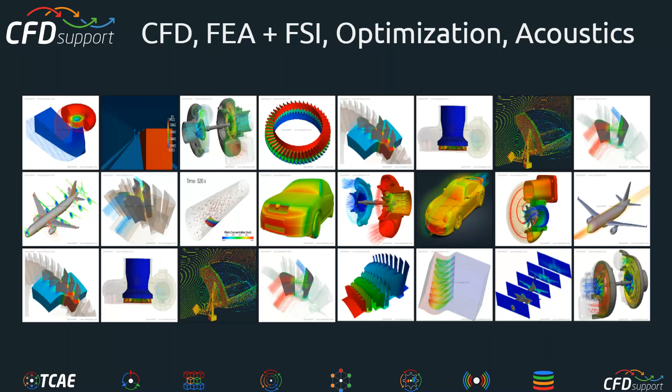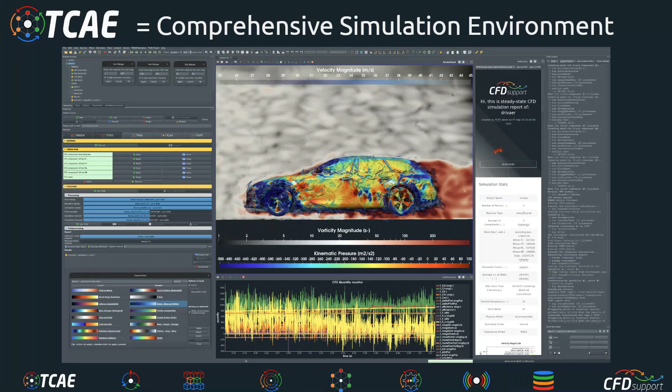But of course, the main product of us is simulation software, which is called TCAE. TCAE is a comprehensive simulation environment where the users can simulate fluid dynamics and related tasks. So that's TCAE, and we will introduce you the new version today.

But let me first note a couple of important notes about TCAE. It consists of software modules. Not everyone needs everything, but all of them can be used, or just one of them can be used. So TCAE is a set of software modules, and every engineer, every user can pick or choose the relevant software modules that work for him or her. So that's important, there are software modules.

There is a module for meshing, for example. There is a module for fluid dynamics, for finite elements. There is a module for acoustics. There is a module for optimization, and some other modules are already in progress. So it's always up to the user what module is used.

That's important. And there are a couple of principles we follow with the software. It's our philosophy, and we follow these principles. So I will now speak about those principles.

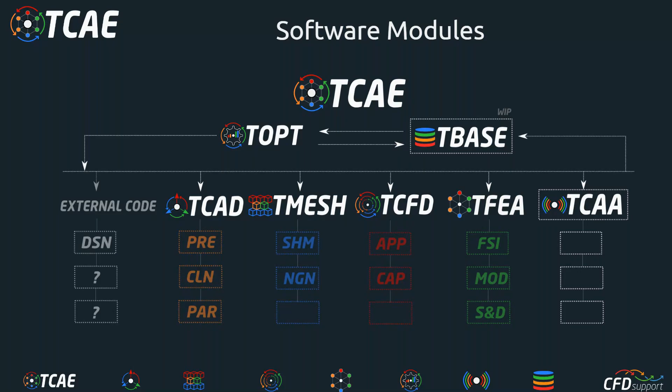TCAE is flexible. Flexibility is extremely important for us. We believe that every engineering department is specific. There are specific habits, specific experience, specific tools, historical development, and everything. So we are extremely flexible.

TCAE is flexible, and it's possible to be used in different ways. It can be used by a single user, it can be used by multiple users. It can be run inside another software, or it can run another software. It's ready for modern workflows, and it's extremely flexible.

It works with other open source pieces. It works together with in-house codes. It works perfectly with commercial codes. It's really ready to help and to be used in a way that is necessary and appropriate to users' skills, users' resources, users' ways of work. So it's flexible, it's unlimited.

It means that yes, we license it because we have to make a living from something. So there are licenses, but the license is provided to a single organization, and there are no limitations on number of its users, jobs, cores, sessions, hardware installations, anything. So basically, the client can use their resources to the fullest. It can be run on multiple software or anything. So for this, it's really unique.

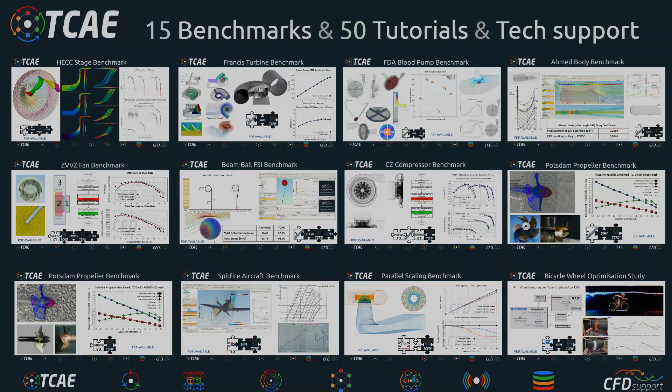TCAE is based on open source. It means it's built on open source pieces, because here at CFD Support we have mastered the process to learn open source, integrate it into TCAE, and provide professional tools based on open source that can be used for real industrial projects. That's very important. There are more than 60 open source projects, and we maintain and update them all regularly. So you can imagine how much effort it takes to put it into one comprehensive package which works.

On top of these open source pieces, we have invested and spent more than 50 man-years of development here, in a group of a couple of PhDs who consistently develop these open sources to deliver TCAE as it is. So that means we have spent enormous time and effort to make out of open source something which is usable in real industrial practice, and that's really the core of all of it, basically.

Okay, so today we are coming with the new release. It's 25.10.

It's so much better than anything we released before, because we have removed more than maybe about 100 bugs that are everywhere, because creating software is in fact really difficult. You have to be prepared for endless variants of options from various users in various conditions for various projects. So it really is difficult to create it, maintain it, and support it. Believe me, we have spent a lot of effort. We have fixed more than 100 bugs, and on top of that, we have created quite some appealing new features.

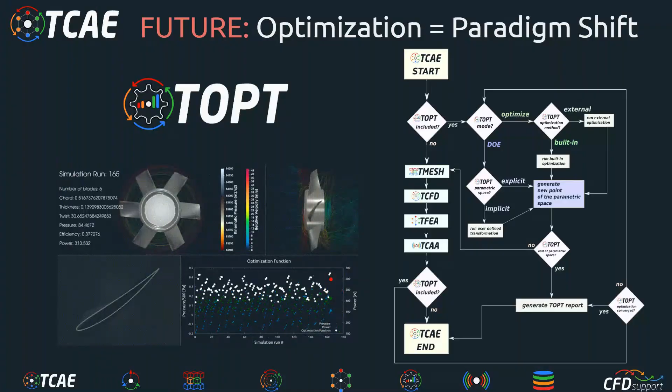We definitely will dedicate a lot of our best research time to acoustics, because acoustics is something really advanced, and not everyone can do that. So we will keep our eye and keep focusing on acoustic simulations for the future. So these two are really important.

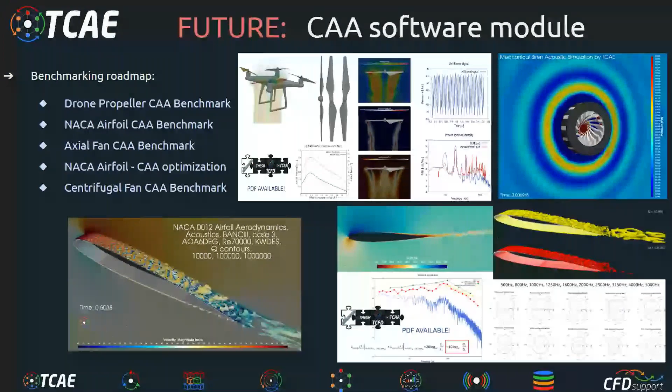We also have a passion for biological flows, especially blood flows. These will be quite researched in our company too. We are going to deal even more with hemolysis and rheological models like shear thinning properties of blood, also the viscoelasticity and a little bit of chemistry, and based on these specifics of blood, we will be optimizing blood pumps. So definitely biological flows are something we are going to keep working on.

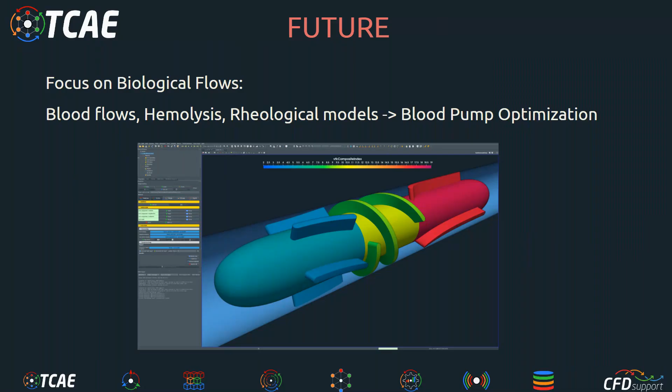Then we are working on a new software module, which is called T-Base. It will allow every user to store results in large databases, keep them for the future, and based on that data, it will be possible to run machine learning and AI, specifically to create surrogate models to give answers in seconds instead of hours or days.

So T-Base is very much advanced already, and the development is in the advanced phase. We are testing it currently, and we will very likely release it soon.

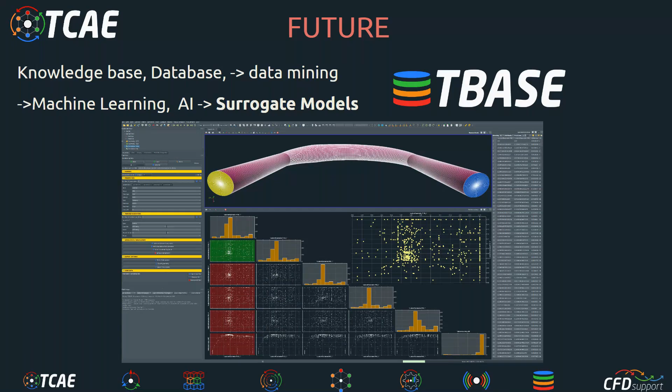Which brings me to what will be the next release. It's scheduled for spring 2026, and it will be huge, because there will be a new OpenFOAM update based on openfoam.org, plus the best things available across the OpenFOAM community, plus those many years spent on open source. So it's a really big update, because everything will be updated to the latest version, and it's quite a big deal. There will also be T-Base, so the first T-Base version will be released next year.

It will be the kickoff year of practically new software, which will be revolutionary, because not only will we develop it, but we will give it into the hands of our users. That's important, it's not being hidden anywhere. It's the real democratization of software, because every user will be able to save their results and use them with AI and everything. So that's what we are going to do, and it's coming. There will of course be version updates next year, and many more.

Okay, Achtung. It seems that there's an expert waiting on the air. So let's take a look.

So, knock, Radek again, are you following? Yeah. Are you going for it? Yes, I was following, so perfectly said, the first part of the webinar. That's great, and I will just continue with a more detailed description of the new features, utilities, etc. So yes, that's really great.

So if I ever will find how to switch the presentation over to you... there's new graphical interface in this, and well, this is me, and well.

Okay, it's a little bit embarrassing, I don't know what to... Oh okay, I see Radek is here. Make a presenter. Okay, GIF, no, you make a presenter. Okay, so I got it, I have it. Sorry for this, I promise I will learn it for the next webinar.

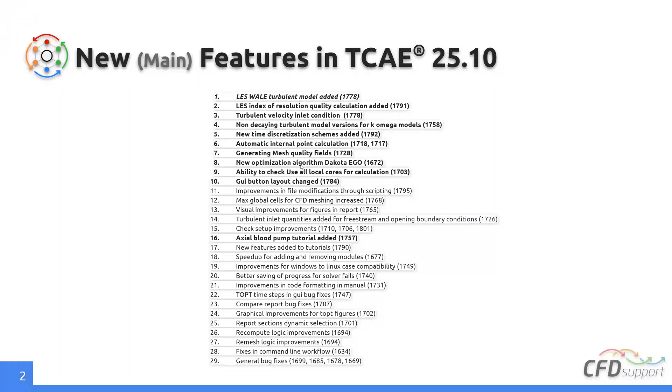Okay, thank you, Luboš. Welcome again, and I will directly dive into the particular features we have implemented. Besides these features which are visible to the user, we made dozens, up to hundreds, of small code fixes, functionality fixes, and other stuff which helps the project be more robust, more stable, more user friendly. This is the list I got from my colleague Prokop, who picked the main merges in our code repository, and I picked the most visible ones and created a short presentation to present these several features which we bring into the new version of TCAE.

So this is the short list. There are just a few small cosmetic changes in the layout. There are new functionalities for the T-Mesh. The main functionality is that the internal point can now be automatically set, so there's no boring stuff like looking for the point which lies inside the domain or inside a component you want to mesh. This is really a nice feature.

Mesh quality fields can also be computed and visualized. Another one: if you don't need to worry about or look for how many cores your computer has, there's a new automated function which just reads the system information about the physical cores and automatically sets all the cores for the simulation if you want.

Then there are a bunch of new features connecting or touching turbulence modeling. One is the non-decaying version of k-omega turbulence models. Then we implicitly bring the LES modeling, so there's no need to enable it via scripting - now you can find the implicit LES model. We started with the wall-adaptive version of LES turbulence modeling.

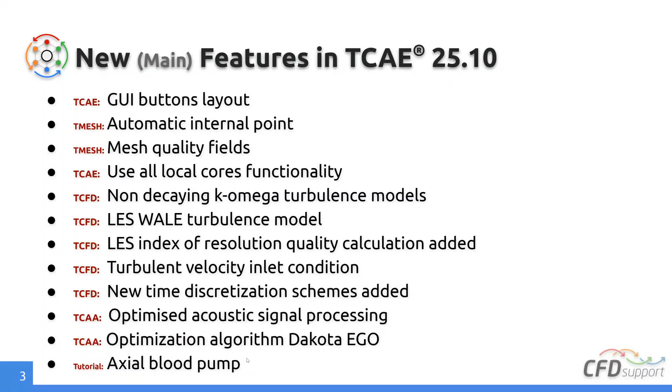Alright, so let's start with the cosmetic changes. You don't need to be scared if you see the GUI layout for the first time. We put some buttons out from the other options to be directly visible on the main panel, like these restore and purge buttons. Restore is just for restoring the case to the preset moment, ready to bring the project ready for simulation from the plain start. The purge button is for when, for example, you would like to share the project with someone for support, or to send to us, or just want to keep the setup and get rid of all non-necessary files like results, etc., for later usage and to save some storage on the disk. So these are just smaller, cosmetic changes in the layout.

But now let's go to the nice features which bring new options for the user. So the first one is the automatic internal point.

Now you don't need to care about the internal point. For those who are not familiar with creating the simulation domain and the meshing part, typically the mesh is created using the external geometry in STL format. If you are using internal flows, you build the geometry from components, parts which are connected next to each other, and each part is meshed separately.

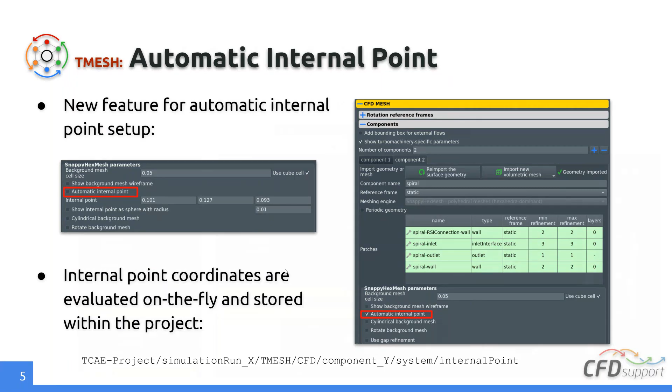Still in tmesh, there is now the option to evaluate mesh quality parameters as fields, which visualize particular parameters like non-orthogonality, skewness, cell ratios, and others. You can easily enable it by clicking in general, in the tmesh section, clicking on write mesh quality fields. Whenever any component is meshed successfully, you can visualize the mesh, and automatically within the mesh there are several fields which you can visualize.

Let me show an example. I loaded the simple pipe tutorial, and I'll show you this automatic internal point option. As you see, you just need to click here - I think now for the new case it's default. You can keep it this way, and you don't need to take care about placing the internal point inside your component. Let's go click on meshing.

Let's go to the manager. I will click mesh all, and now the meshing will start. But first, because I made some changes, I need to apply these changes, and now I can click mesh all. So now the meshing is being done.

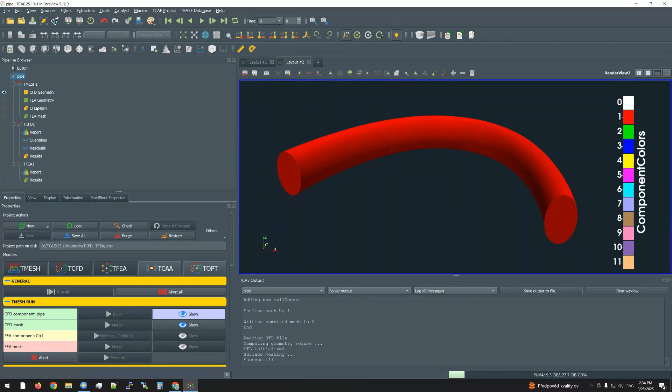When it's done, I can click here, show component. I'll get rid of it, so now in the pipeline browser I need to visualize it. This is the CFD mesh, I will get rid of CFD geometry, and as you can see now there are several fields to be visualized - these are the main quality parameters of the mesh.

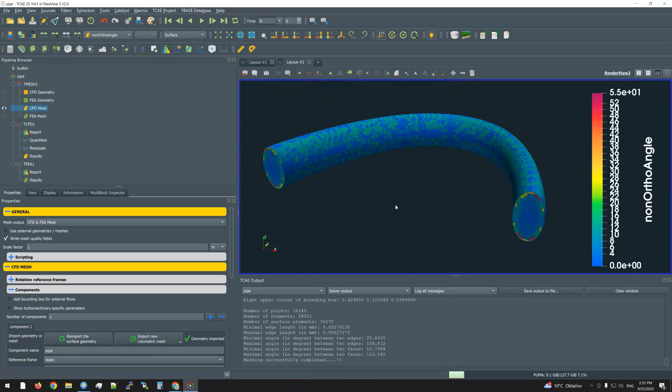Typically the non-ortho angle visualization - for bad meshes, you can nicely locate the bad non-orthogonality regions and try to, for example, remesh it. Maybe it's connected to the bad geometry quality or sharp edges, so then you can redesign the geometry and try to remesh the component and see if it helps, if you reach less non-orthogonality, etc. You can play with this visualization as you want.

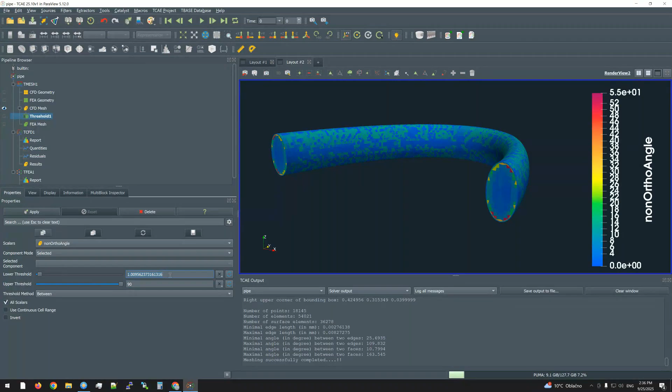For example, if you would like to see the given non-ortho cells, you can apply the threshold and choose the given parameter - for example, this non-ortho angle. Now I would like to see all the cells which have non-orthogonality higher than 40 degrees, and now you can see all the cells having non-orthogonality larger than your threshold. Here maximum is 55, which is a pretty nice mesh from the non-orthogonality point of view.

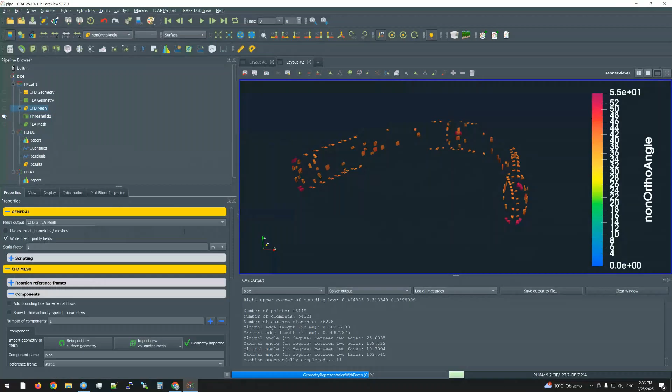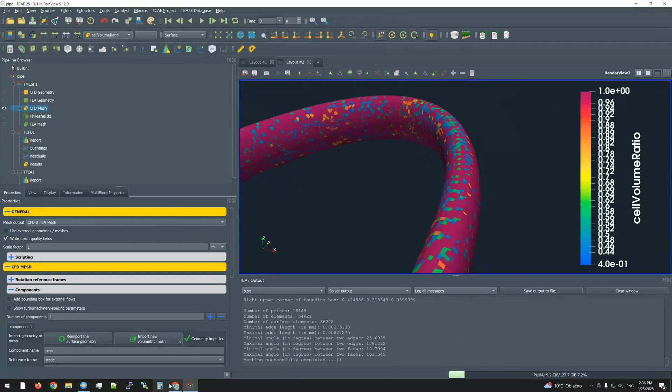In the same way, you can visualize the other ones: aspect ratio of the cells, cell volume ratio, or cell volume itself - the sizes of the cells. Cell volume ratio, for example, is the minimum ratio of the neighboring cells to the given cell, etc. If you would like to see the list of all of them or any other explanation, you can go to our web pages, to the documentation, open the manual - for example, I'm not sure what cell volume ratio is, so I will type cell volume ratio.

Okay, if I type it correctly, it should be found. Yes, so the cell volume ratio is the minimum ratio of a cell's volume to that of its neighboring cells.

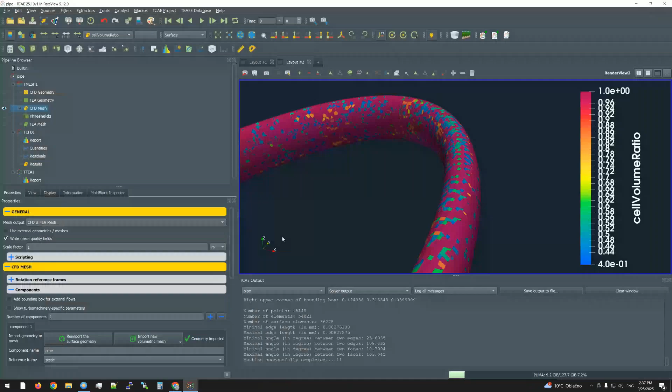Here are the explanations of all these parameters. I think this is a very nice feature, mainly for tuning the mesh to the best possible quality. In this way, you can really nicely play and visualize what you need.

So this was the mesh quality fields. All you need to do is check these mesh quality fields, because it takes some time to evaluate them. If you go for optimization or some repetitive work, you are able to uncheck it just to speed up the whole process. So therefore, it's on demand and not automatically evaluated.

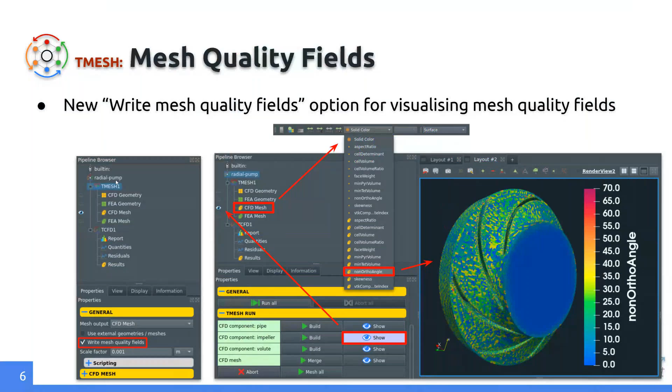Then there's a new feature, the use all local cores functionality, which is a small feature but pretty useful. By default, if you go to the tMesh or TCFD module where the number of processors is set, you can set the number of processors you would like to use if you don't want to use all physical cores, or if you set it to 0, it will automatically use all local cores. It will just check the system properties, find how many physical cores are available, and automatically set this number for the simulation.

It's connected to the local cores, not to the nodes or some clusters. So it's always connected to the node from which the TCAE was run. All right, so the use all local cores functionality is also pretty useful.

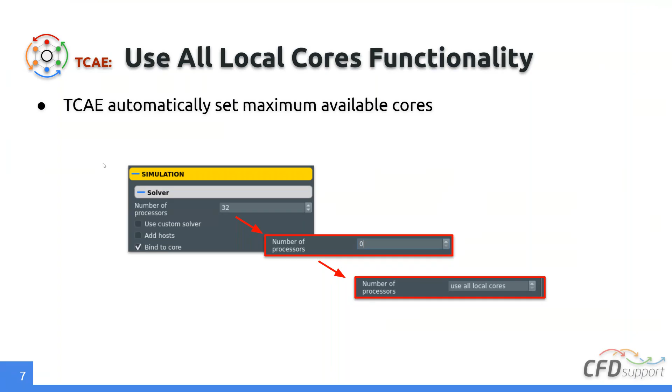Then we are coming to turbulence modeling. We have requests, and we see the importance of proper turbulence quantities modeling, typically for external flows. You can imagine if you do external flows like airfoils or any other, you make your domain big enough to get rid of the influence of boundary conditions and boundaries.

But if you make the domain pretty large and you keep the standard setup for k-omega quantities, there is huge dissipation because of the omega dissipation of kinetic energy. You typically know what are the proper values to be used for the simulation near your body, not far from your object. One option is to somehow apply some set fields and keep some values in half of the domain before your object at the chosen value, or we implemented a more clever option.

This is the non-decaying k-omega turbulence model, which basically keeps the minimum value at the inlet within the domain. Pretty simple to explain: the turbulence equations are equipped with a new decay control term, which eliminates the effect of the dissipation. It just keeps the values of k and omega at some infimum or minimum values, which is set in the given dictionary.

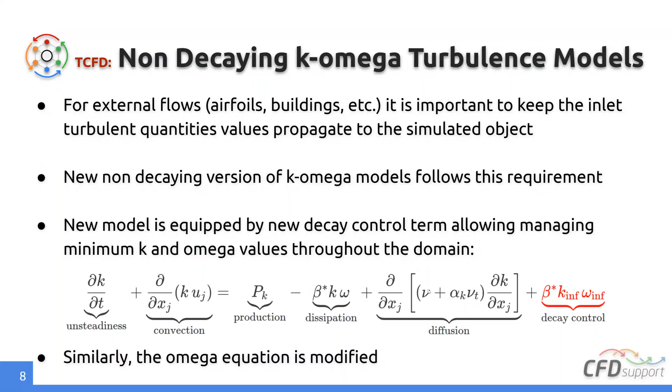What is the effect? For example, if you are simulating airfoil external aerodynamics, typically the standard way is to have the domain 100 times larger than the span of the airfoil or the chord. So the domain is pretty large, hundreds of meters if you have a 1 meter airfoil.

If you set a standard k-omega turbulence model and you set some value at the inlet for k, for example 0.5, and omega to 10, which is pretty low omega, you can still see decaying of these values, and basically just before your object there are totally different values than what you set for the simulation. Even if the omega is larger, which typically is the case, the turbulence intensity or kinetic energy is pretty low, and it doesn't follow, for example, the definition of the simulation or of the problem.

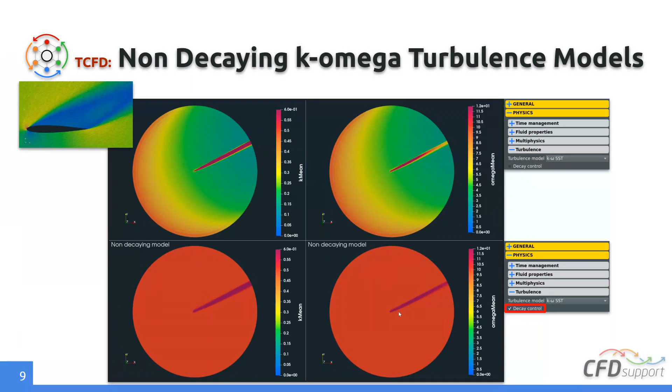So if you basically enable it, there is just one button, an option to enable or disable this decay control. If you enable the decay control, you will see that the inlet values are kept throughout the domain, and as an outcome, you really have the proper turbulence quantity values near your object. So you are simulating what you really wanted to simulate. This is the decay control.

Just to show you, it's pretty simple. You go to physics, to the turbulence modeling, and with just one button click, you have it enabled. This is the non-decaying k-omega turbulence modeling.

Then we implicitly offer the usage of the LES turbulence model. Particularly, we started with the wall adapting local eddy viscosity turbulence model.

To enable it, it's pretty simple. You just choose this model, for example if it's just for transient simulation, the LES. So if I go to the time management, I enable the transient simulation, and going back now, we have the option for which turbulence model to be used, with just two parameters: standard LES delta coefficients for the subgrid scale modeling, and turbulence Prandtl number for boundary conditions. Okay, going back, so this is it.

The importance of mesh refinement is pretty high. Of course, you can enable and run it even on a rough mesh, but the accuracy and the results will not correspond to the expected values. There are basically no limitations, the only limitation is that you need to really use a highly resolved mesh to get accurate results. But the setup is pretty straightforward.

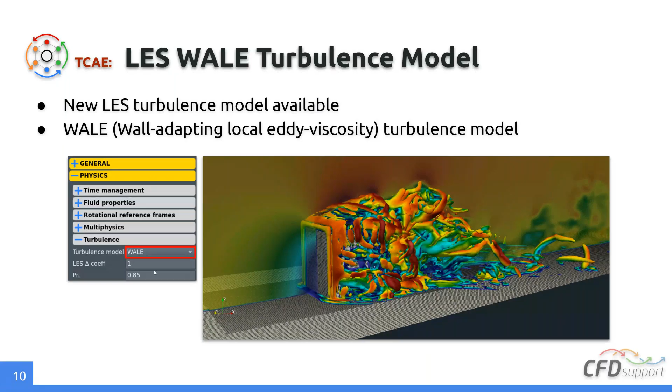Connected with the LES models, we implemented these LES IQ coefficients, which can show you if the resolution of the mesh in the volume is okay or not. This is a simple rule which compares the values of the resolved turbulent kinetic energy, resolved by the grid, and the kinetic energy which should be modeled by the subgrid model. This proportion should be close to 1, so if there is no modeling, the value should be 1. This is the first check if your mesh is resolved properly and your result has a chance to be accurate, and you are basically running the LES mode and not just some modeling. The appropriate values should be higher than 0.8, so at least 80% of the kinetic energy should be resolved, and typically you would like to see a value of 1 everywhere.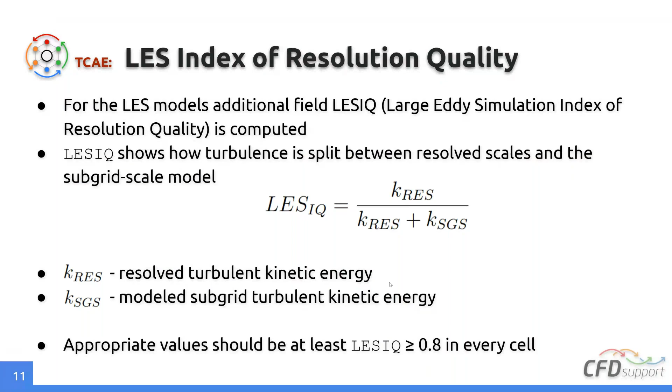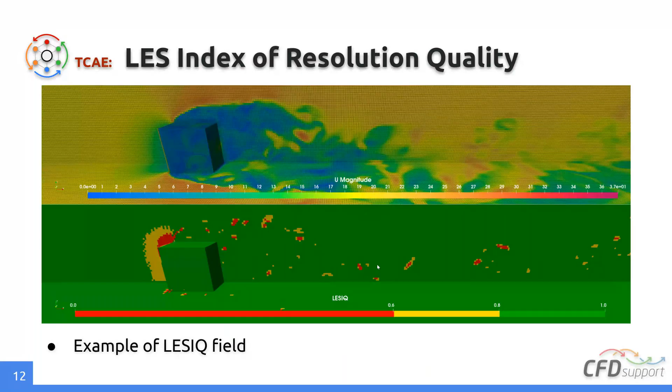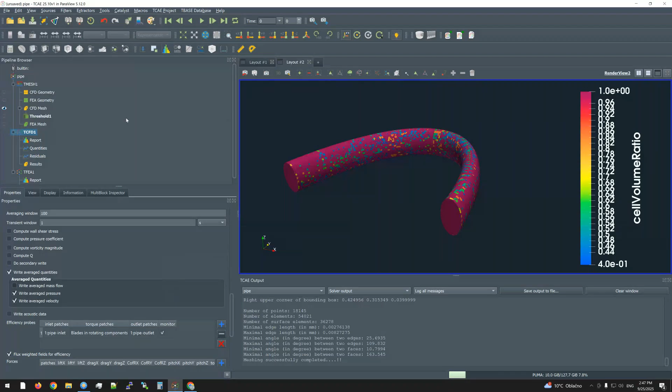And if you would like to compute it, it's pretty simple, it's done automatically. So what you need is to just check here in the runtime averaged quantities, to compute average quantities, to write average velocity, because it's just some fluctuation of the velocity to evaluate properly these indices. Then at the end you will see the field LESIQ, which can be visualized. I have no results here, but basically it's pretty straightforward, like you visualize velocity at the end of the simulation, in the same way you can visualize this coefficient. So this was the index of resolution.

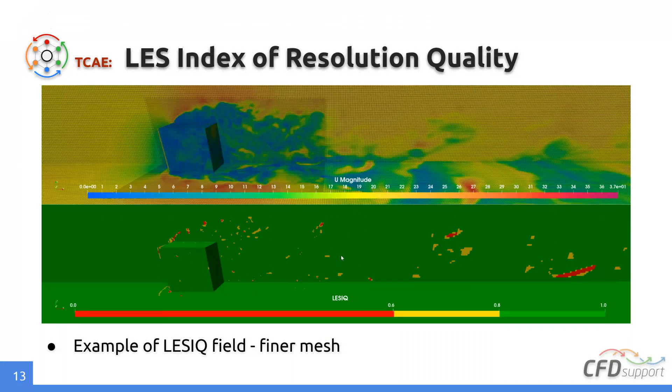And the last option is the turbulent velocity inlet condition. So when we are going into the LES field, we would like to also see the real fluctuation of the velocity, not just modeled by k-omega like for the RANS models, but here we would like to make some real oscillation in velocity. It uses a pretty simple boundary condition, called turbulent inlet velocity, which just adds a random component to the mean field. The parameters are basically the reference velocity, the velocity at the inlet, and the fluctuation scale in percentage. What you would like to add is just add the turbulence in the perpendicular component, towards the direction of the flow.

So the fluctuation scale is set in this case only in y and z direction. There will be a 10% root mean square value added to the reference field, so it doesn't change the flow rate, but it just adds the fluctuation. And alpha could be called some kind of relaxation, but it's not a relaxation, it's just the fraction of new random component added to the previous one. So you can basically model, or you can enhance how the frequency of the oscillation behaves.

Here's a simple example. This is a transient simulation, the LES, same as I showed you before, but without the turbulent inlet, so with a simple fixed inlet velocity. These vortices are visualized using the Q criterion. As you'll see in the next slide, I use two criteria: a higher one for showing vortices in this half of the domain, and a lower Q value to show the turbulent vortices for the inlet velocity.

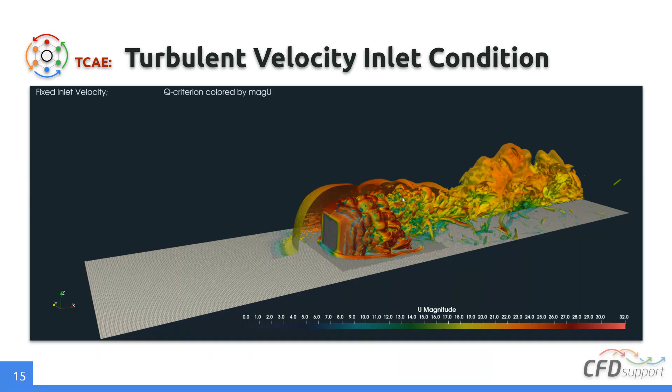So this is without it, and this is how it looks with the turbulent inlet velocity at 10%, as shown in the previous slide where the turbulent velocity inlet was presented. You can see turbulence everywhere now. This is basically how the turbulent velocity inlet works, so for a basic simulation with real turbulence velocity inlet, I think it's pretty nice.

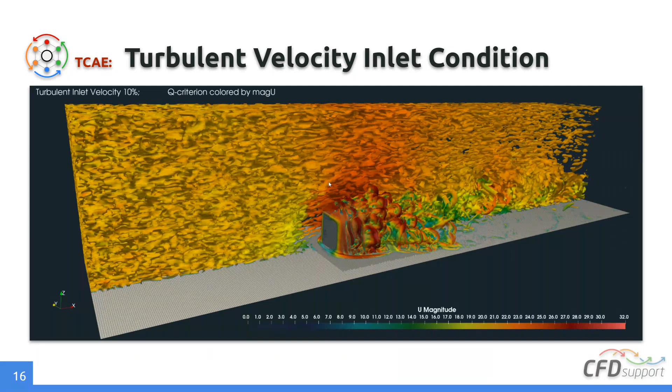Now the user has this option of how to generate the turbulence from the inlet for the LES-like or DES-like models.

For LES modeling, we also need better discretization schemes, both for spatial and temporal discretization. In previous versions, we needed scripting to enable these discretizations, so now we added it to the standard options. In the solver setup you now have special spatial and temporal discretization options, with a list including Euler, the first order implicit scheme that was default in previous versions. Now you can also choose backward, which is a full second order scheme but potentially unbounded, so everything needs to be smooth enough to enable it.

Or you can go for the Crank-Nicolson scheme, which is second order implicit but blends between Euler and Crank-Nicolson. Based on your geometry and physics you should choose the proper value; 0.7 up to 0.9 is okay for standard industry applications. So now you have these options.

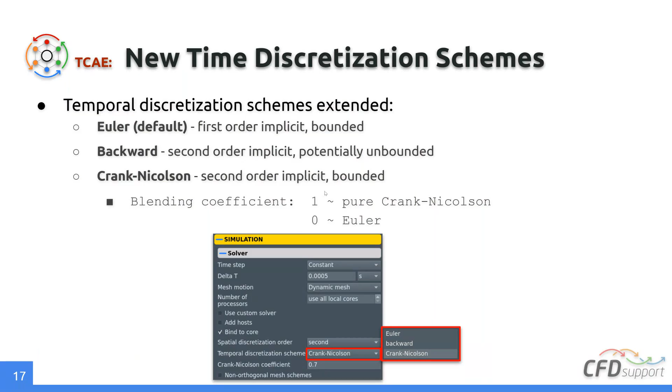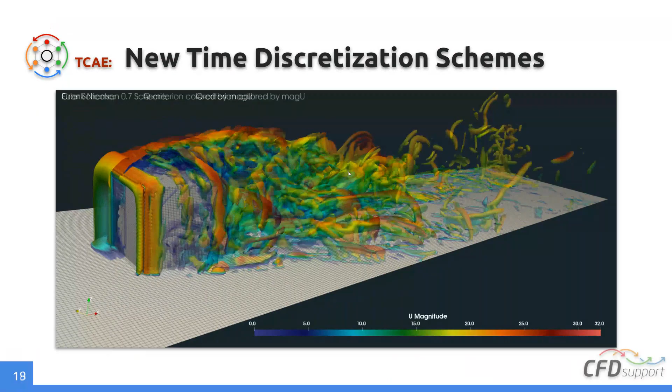Here's how it looks when you use just a first order scheme versus a second order scheme. This is again a simulation of the box, with the Euler scheme, and this is the result with Crank-Nicolson, with the Crank-Nicolson parameter equal to 0.7. You can see the resolution is better and the temporal dissipation is much lower for the higher order schemes compared to the first order scheme. So you can see the importance of discretization schemes with respect to resolution and vortex shapes.

Then for TCAA acoustics, the colleagues implemented and optimized the algorithm which processes the signal. Just to quickly repeat, from the CFD simulation you gather information about the pressure fluctuation on some reference surface, and this reference surface data is then taken to process the acoustics, making the acoustic analogy and propagating the acoustic signal towards the observer.

In the previous version, the algorithm needed to take all the data for all time steps to process them, which for very fine meshes and fine reference surfaces could take more than 100 gigabytes of memory. But this new algorithm is much less hungry for RAM, and the benefits are visible: you need more than 10 times less RAM usage for processing the signal, and the speed of processing was also improved. The new algorithm is more efficient and more accurate because we also re-implemented some coding which makes the code even more accurate, faster, and less hungry for memory.

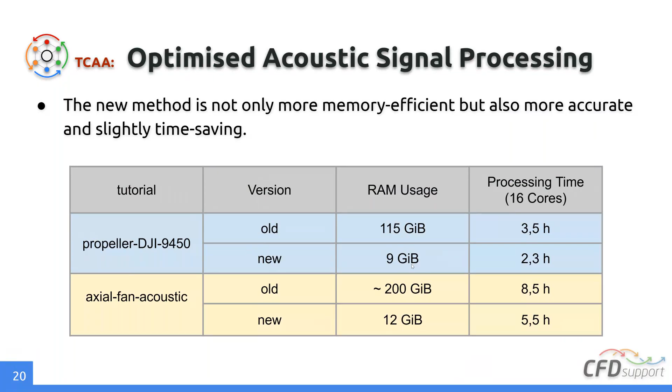Okay, I think this is almost the last one: the optimization algorithm Dakota, the EGO. Efficient Global Optimization was added from the Dakota software.

In the previous version you needed to create a script to connect Dakota and TCAE, but now it's implemented internally. It just requires having the installation on your computer, and if it's not visible in the system, you can add the path to your Dakota installation, and then run it and everything is connected together. In this way you can use the new optimization algorithm, this Efficient Global Optimization. You can find it on the Dakota web pages for more details, but the connection now is pretty simple.

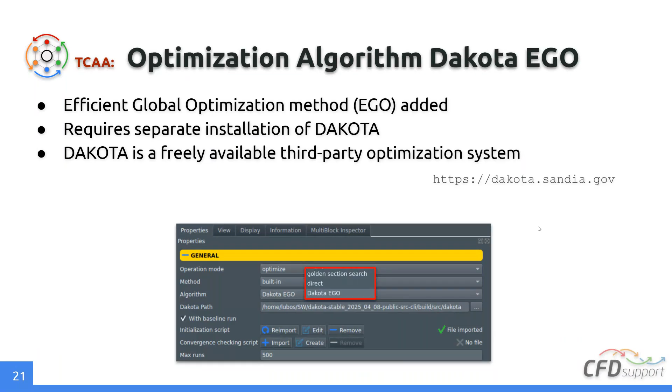And the last one is the axial blood pump. As Lubos already mentioned, we are part of a new long-term research initiative focused on biomedical flows. So we started with optimizing the blood pump, and there will be several other works. We cooperate with Technical University and Czech Academy of Science. So we put the basic geometry and made it available for the users to play with this kind of application. This is now also available on our web pages, you can find it there. And I think this is all from my side.

So this was the main list of the visible new features and functionalities. And as already discussed, there were many bug fixes which are not directly visible but make the product, make TCAE, more robust, more efficient, more accurate.

Okay, so now let's see if Lubos is still there. Yes, yes, I'm closely following. Radek, of course I am. Thank you, Radek. It was, yep, again you did it. Yeah, pretty nice, so it was like an overview of the new features, so thank you for it. So it's back on me, I guess. Can you see my screen? Oh no, I need to say again, I am going to share it. Okay, so I'm doing it now. So yeah, now we can see. I'm back in the presentation. We can see it, yes.

Yep, so Radek, feel free to serve yourself with the questions. I'm taking one already. So Leopoldo, yes, hello. Well, we are coming, we promised we will come back with cameras, Radek, quick, right? So okay, we're coming back. Yes, we are here, it's us, we are humans, right, still alive. And okay, Leopoldo, by the way, we will see each other in Uruguay. We are going to Uruguay with Radek to give a training and participate in the conference. So anyone is welcome if you want to have a beer with us on the Southern Hemisphere, so you're welcome next month. And yeah, Leopoldo is asking, he will be there by the way.

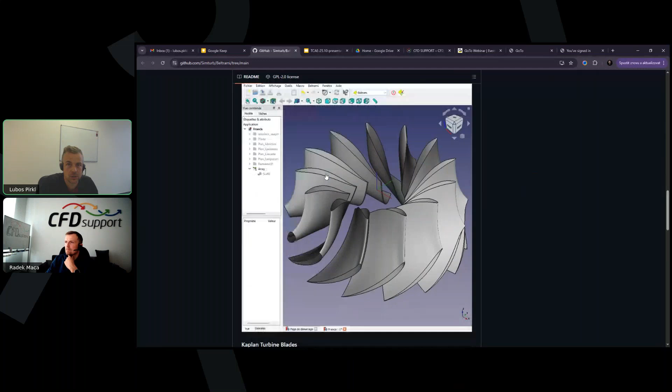Could you create a module to design hydro turbines? Yes, this is actually a good question, and it's quite principled, so let me answer it. TCAE is by its default, by its origin and by its nature, a simulation tool, right? So TCAE takes the geometry and simulates it, but it's not a design tool. Not by nature. We can help to get as close as possible. We can integrate design tools. We can even create simple design tools, or some CAD systems can be design tools, but we are not design engineers. We are a group of very efficient and smart engineers here at CFD Support, Radek, right? And we don't do design. So the design of the machines has to come from somewhere else for several reasons, it's the way we have chosen. But of course, I did a little research during the webinar, so I will share that I have found, for example, about hydro turbines, this guy called Beltrami, I guess it's the name of this guy. He created and made publicly available on GitHub this tool which allows parametric creation of hydro turbines, for example, or blade turbomachinery in general.

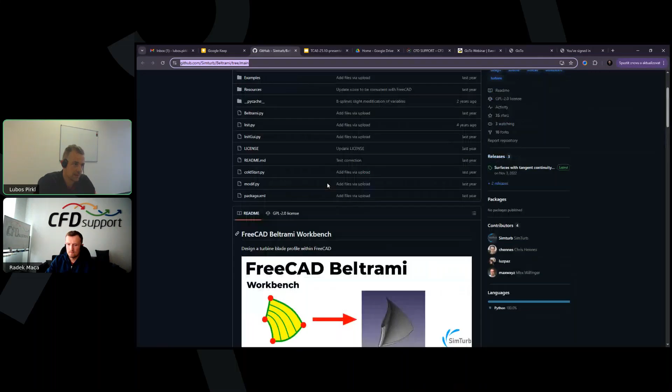So yes, maybe in the future we will play with it, but anyone can, because it's public and open source, and you can take a look. You can Google it and play with it this evening. With ChatGPT, it's very efficient to play with these Python scripts, and I'm sure you would quickly get what you need, because it seems to be parametric. So that's just an idea. You can play with this, but it goes beyond our field, and we believe it makes sense to do something we know very well and where our added value is high, which is simulations. But we will be happy to help with other things.

We also had email correspondence with Leopoldo, so I recommend this. For example, Rhino is really good and cheap professional CAD system. So if you haven't one yet, Rhino would be definitely a good candidate. I know some people use it for parametric building, parametric geometry builder for turbo machinery. I know quite a few groups who do that very successfully. By the way, the axial pump for the blood flow is also created in Rhinoceros slash Grasshopper, and it's very efficient, and it works, and the model is parametric. But it's a side business for us. The main business for us is definitely simulations.

I hope I'm transparent in this. I hope it's understandable and clear.

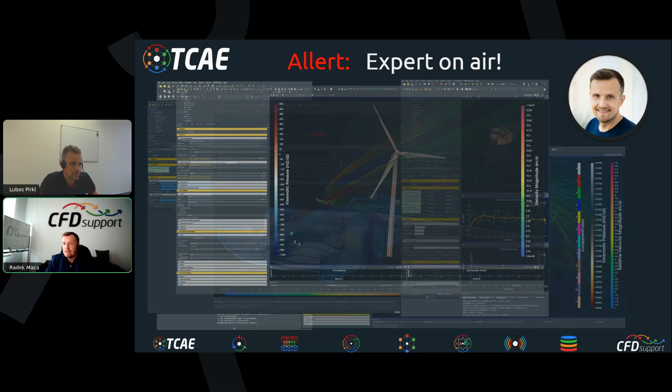Okay, I have to say I don't see any other relevant questions to answer at the moment. So this could be it. We are also running slightly over time. We scheduled this webinar for about one hour, so we are not going to torture you anymore, and we will stop right here.